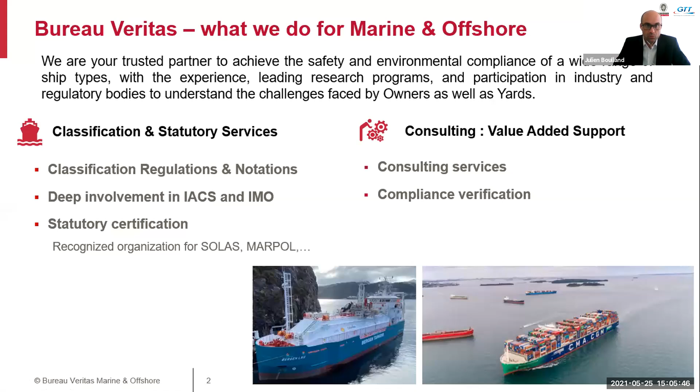Then in the third part, I will share with you what we do in Bureau Veritas regarding ammonia as a fuel. So we are about to release soon in July new rules on the usage of ammonia as a fuel on board ship. So we, in our role to support the shipping industry and support innovation, we in BV have worked on the development of these new rules. So please stay tuned, and I will share in this presentation the key principles and the content of this new rule note.

And then in the last part, the fourth part of my presentation, I will share on another notation that is called ammonia prepared. That also will be released this year, very soon in July as well. So in the scope of this ammonia readiness, we have worked together with GTT. So ammonia preparedness basically gives greater flexibility for ship owners whose intention is to go to LNG and ammonia. So at this juncture, I would also like to thank GTT for their trust and for the work that we have carried out for them on this ammonia preparedness.

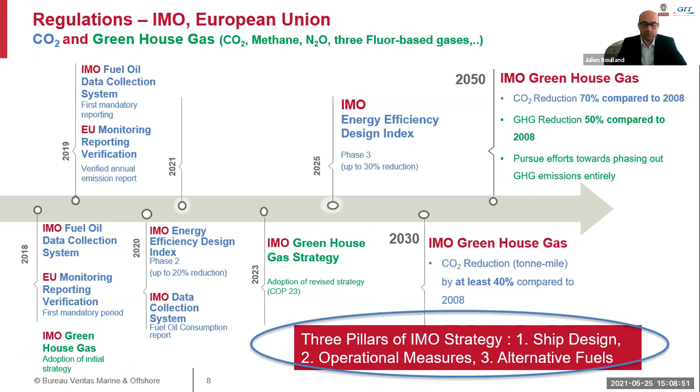What we see on the timeline is basically ship design is covered by this so-called EEDI, Energy Efficiency Design Index, which applies to a new build ship. So the phase 2 was in 2020, the phase 3 will be in 2025. In 2025, it will be required to have the 30% reduction on CO2 emission.

The other measure you see started in 2018 is basically the recording and monitoring of the fuel oil on board, with indirect calculation to determine the CO2 emission. Basically, the idea of this is without any data, we can't have a proper policy. So we need to have accurate data to rely on to set the policies.

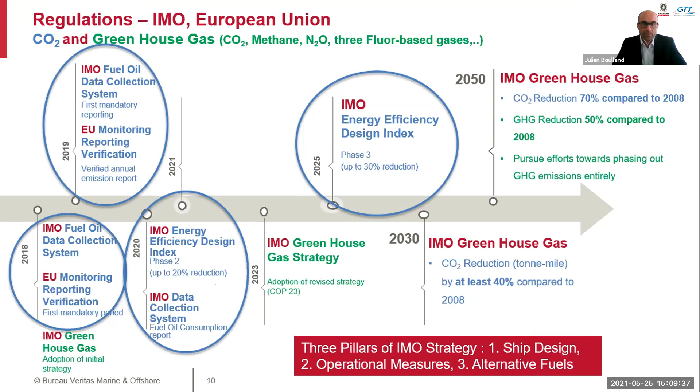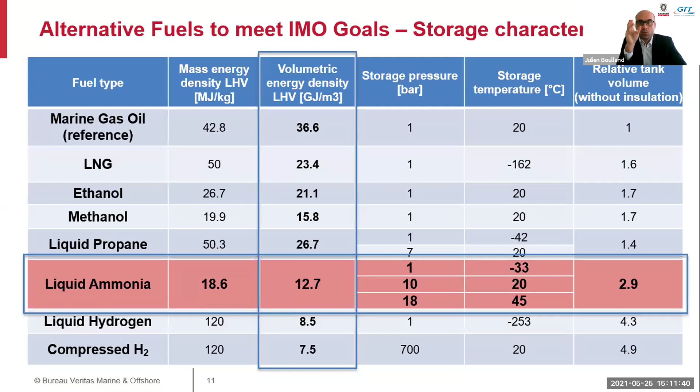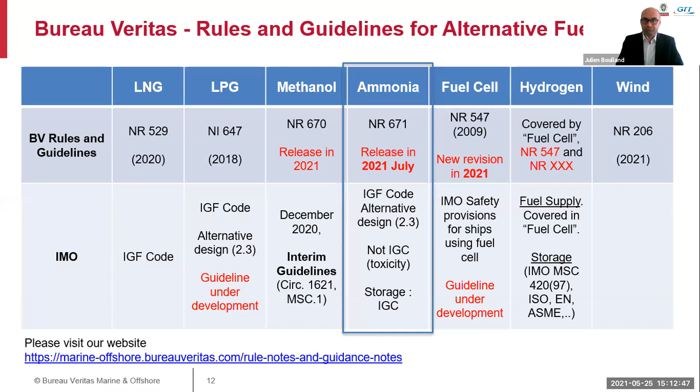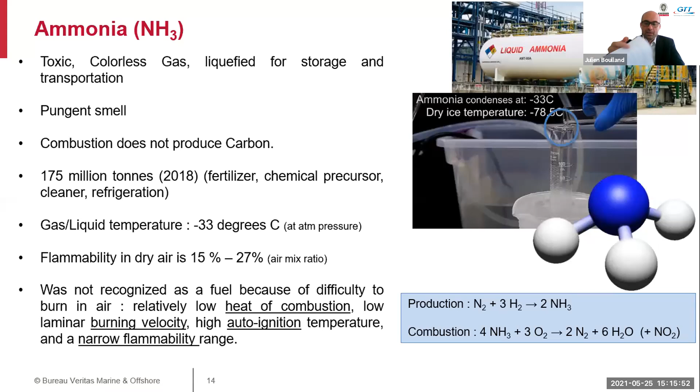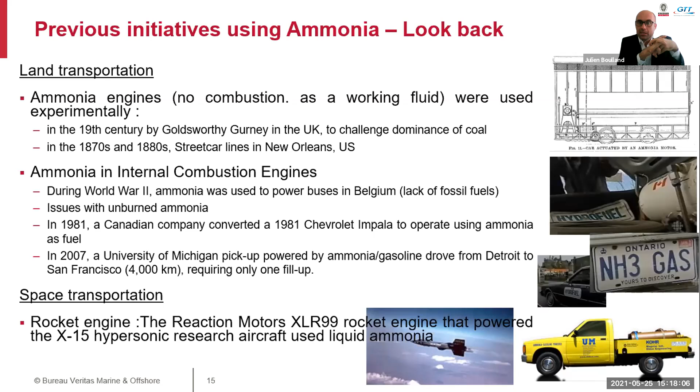The production of ammonia, as I said, is one of the most produced inorganic chemicals worldwide. We have 4 countries that cover more or less 60% of the worldwide production: China, Russia, USA, India. The production of ammonia in its industrial form makes use of the so-called Haber-Bosch process. Basically, we have one molecule of nitrogen and 3 molecules of hydrogen, and then we produce 2 molecules of ammonia. This industrial process operates at moderate temperature, 450 degrees Celsius, but very high pressure, 100 bar. And this process in its current form is very highly energy intensive.

That means on the production side of ammonia, definitely it's not carbon free. There is a lot of carbon that is produced. On the combustion side it's okay, it doesn't produce carbon, but on the production side, we have to work on it. This is why on this slide we've put, and we thank JGC Corporation for this, the so-called brown ammonia, which is the current form of production; the blue ammonia, where if we can capture carbon during production through a carbon capturing scheme, we can improve the carbon footprint of the production. And then the next phase will be green ammonia, produced from renewable sources. Then we have water electrolysis that produces H2, and in turn we produce ammonia. So it's still a long way to go to produce carbon-free ammonia.

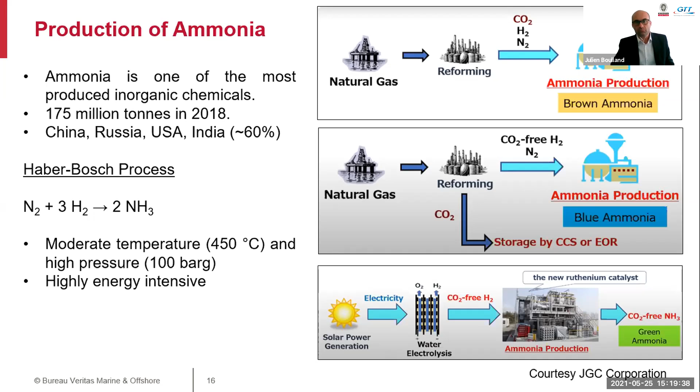Nevertheless, let's come back to shipping. The transport of ammonia at sea is a long story. It's been done for many, many years. Ammonia, again, not as a fuel, but as a cargo, is entirely covered by the IGC code. The IGC code is the code for the construction of liquefied gas carriers. So basically, ammonia is transported on board LPG carriers, either in a fully refrigerated form at minus 33 degrees or so-called semi-pressurized, semi-refrigerated at, let's say, a temperature of 20 or 40 degrees.

So here we have an example of an ammonia carrier, a 22,500 cubic meter LPG carrier. As I was saying earlier, ammonia, when we look at the liquid gas pressure-temperature diagram, is very much similar to propane.

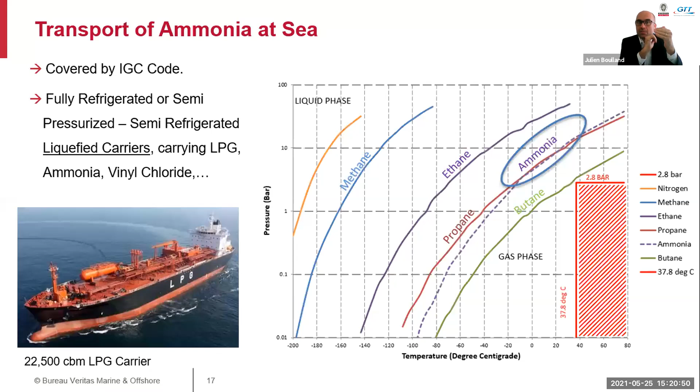Then going to ammonia as a fuel, the minimum ignition energy required to burn ammonia is quite high, several orders of magnitude higher compared to carbon-based fuels like methane, LPG, and methanol. So that's why we need to bring more energy in the combustion engine to burn ammonia. Also, the flammability range is different, so this is also something to consider when we develop engines.

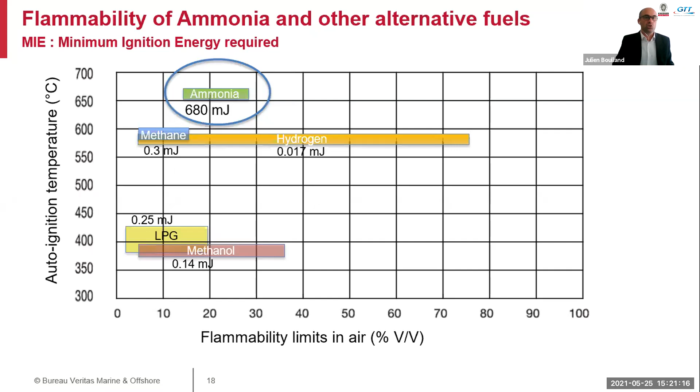Now let's have a look at the characteristics: the toxicity, environmental impact. So ammonia, I don't know if it's good or bad, but it's lighter than air. That's what we read in the LPG carrier operating manual. Basically, all the other gases transported by LPG carriers tend to be heavier than air. Ammonia is lighter than air, so it will go up. However, when the air is saturated with water, high humidity, ammonia will be heavier because there is a formation of an ammonia vapor cloud. So it will drop down in humid air.

Interesting feature, which is one of the, I would say, pillars of safety with ammonia: it has a very high solubility in water. We can dissolve ammonia in water. We can't dissolve gas that easily in water, but ammonia is easier. So that explains one of the safety features about ammonia, how to mitigate the impact of ammonia release.

When we look at toxicity, as I said, it can be smelled by a human at a concentration of 5 parts per million, 5 ppm. So actually, we can detect it before it becomes dangerous or lethal. At 30 ppm, ammonia starts to be dangerous. These two concentrations, 5 and 30, are also something we have put in our rule for ammonia as a fuel. We have detection at 5 and at 30 ppm. 30 will launch a water mist system to capture ammonia. And above 100 to 200 ppm, depending on the exposure time, ammonia has irreversible health effects.

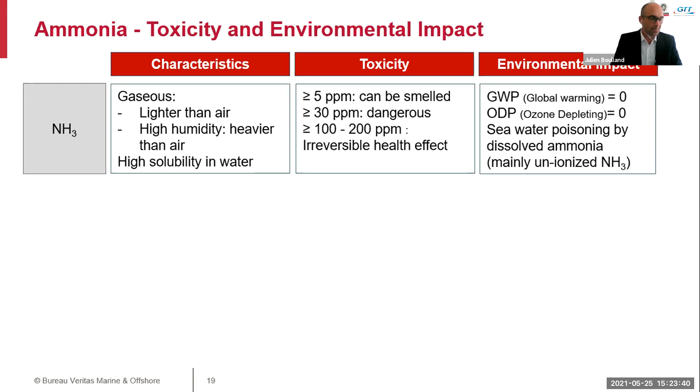The other toxicity is the byproduct of combustion. As I said, we can produce NOx, NO and NO2, by burning ammonia, so we have to be aware of that. It's a pollutant regulated by the IMO, so we have to control that. We also have unburned ammonia slip that we have to mitigate. And the last gas we can unfortunately produce with ammonia is nitrous oxide, the laughing gas. It's a very potent greenhouse gas with a global warming potential 300 times that of CO2. So we definitely don't want to produce N2O by using ammonia.

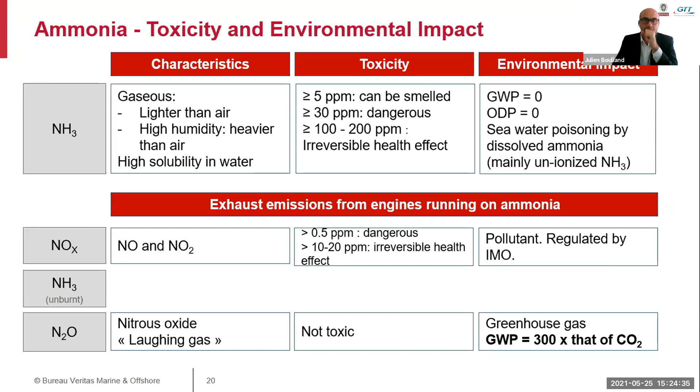So ammonia, now the corrosivity: it's an alkali. Basically it will corrode galvanized metal, zinc, copper, brass. So when we are talking about engine development, fuel gas supply system or tank development, it will not be possible to use zinc, copper, and brass. If the concentration of nickel in an alloy is above 6%, it's not possible as well. I think Stephane will develop on this in the material selection. There is some material we can't use for the membrane.

And it also touches on the quality of ammonia. It's not the same topic, but we have a similar topic with LNG on quality. If ammonia contains oxygen at a few ppm, it can promote stress corrosion cracking in steel, so we want to avoid oxygen. On the other hand, iron, steel, and specific non-ferrous alloys are resistant to corrosion by ammonia. And some rubbers and polymers are also compatible with liquid ammonia.

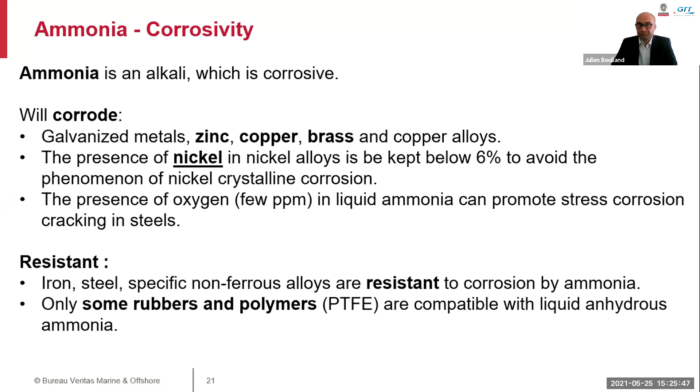Talking about engine. So basically, when developing an engine, we can use LPG or LNG engines as a basis, but the whole fuel gas supply system and engine have to be really rethought, taking into consideration the characteristics of ammonia that I have highlighted.

Basically, ammonia cannot be used in existing low-pressure Otto cycle engines because of the narrow flammability range and the high ignition energy required. So we probably need to use the diesel cycle and a certain amount of pilot fuel, up to 20%. The corrosivity on copper, nickel, and plastic means all the fittings on the piping, everything, the valves on an engine, will have to be rethought.

So material selection. One of the basic principles is also double wall, with ventilation of the inter-wall space. One of the challenges, as I said, is the problem of foul odor. This is the first step, and the next step is toxicity. So they have to have an ammonia capture system. We cannot release it like gas; with ammonia, we have to capture it and then release it.

Another challenge when developing engines is the multiple fuel supply system. Four-stroke engines, as we understand, will have to use a mix of fuels. So probably on board, we will have to have diesel, LNG, maybe ammonia. So flexibility is the key, we think.

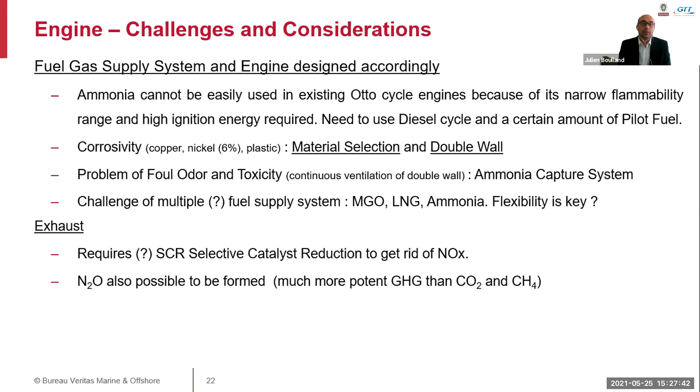And then talking about the exhaust, as I said, there might be production of NOx. So ammonia engines right now would need selective catalytic reduction, that means to capture and transform NOx into N2. And as I said, nitrous oxide can also be formed.

So now moving on to what we've done on the use of ammonia as a fuel. I will just go through the key principles of our new rule note in one slide. Basically, we want to prevent leakage, to limit the consequences of ammonia toxicity. So the tank and pipe will have to be designed at 18 bar and for 45 degrees Celsius, and double wall piping will be the design principle.

We want to detect and manage possible ammonia leakage. This is why I was saying we will have the 5 ppm and 30 ppm thresholds that will trigger various reactions in the system. The management of the leakage, we propose, will be through a water mist system. And when the ammonia is captured, the design will also need to cater for a concentration reduction system.

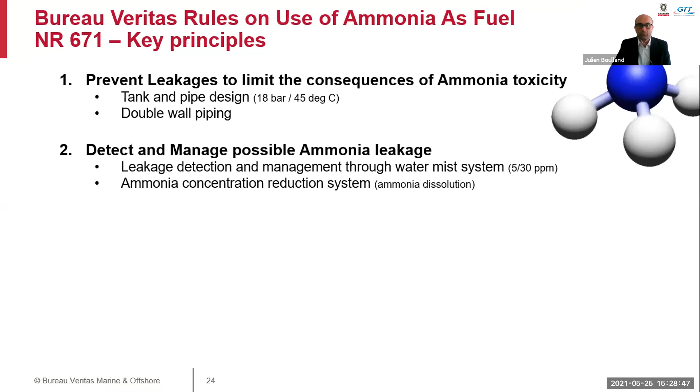They will be required to have a dedicated bilge system for the whole fuel gas supply system, to manage possible ammonia spillage. And the control of ammonia discharge at sea.

We know the reaction between ammonia, NH3, in water and NH4, which is non-toxic, is affected by the pH, the acidity of the water, the temperature, and the salinity. So through this chemical reaction, we can monitor the concentration of free NH3, which is the toxic molecule in this reaction, and control it by playing on pH and temperature. So the ship will have to have this mechanism to control the toxic version of ammonia before it is released at sea.

Corrosion prevention: we have a lengthy chapter on material selection for each and every part of the ship systems handling ammonia, because, as I'm saying, ammonia is corrosive on some specific materials. And the containment system is based on IGC, because IGC has done the work on the carriage of ammonia at sea as a cargo. So the containment system is a mix of the IGC code and IGF code approach. IGF is goal-based, and we'll also require a boil-off gas management system.

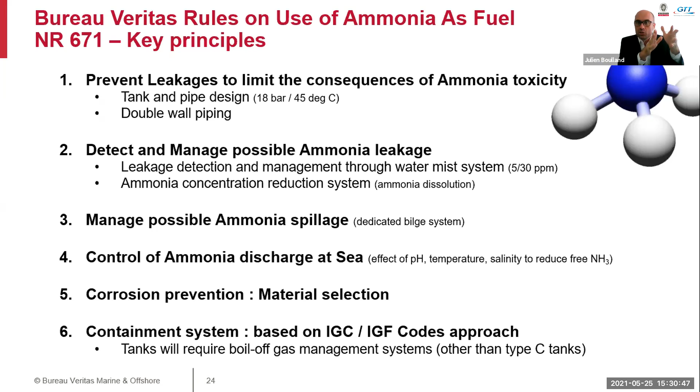We are involved in a number of projects. I cannot disclose everything, but this one is with a large consortium. BV is part of it, with various ship operators and makers. The purpose of this consortium is to investigate the feasibility of using ammonia as a fuel.

So the HAZID workshop was done 2 years back. The HAZOP was supposed to be done last year, but because of COVID, there was a bit of disruption, so it will be done this year. Basically, the purpose is to investigate the safety and operational hazards. All this work has, I presume, been fed into these various companies. As far as BV is concerned, we have used this work as one of the sources to feed our new rules for ammonia as a fuel.

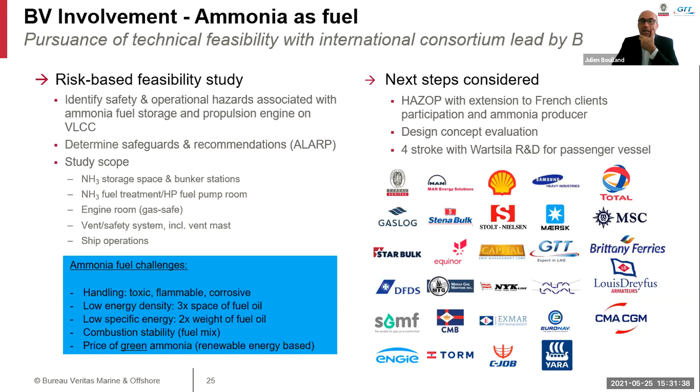And then the last bit is the ammonia prepared notation and the work that we have done for GTT. Basically, ammonia prepared will give a ship operator additional flexibility when they want to go to ammonia, but not straight away. They may want to start first with LNG and then go to ammonia, or use conventional fuel and later go to ammonia. So we have this ammonia prepared notation.

To grant this notation, we will have to have a full design review through a risk assessment of all the machinery and engine propulsion system. They have to have minimum arrangements on board for space reservation, ventilation, piping, taking into account the hazardous area, and structure and stability also have to be investigated. Ammonia is a bit heavier than LNG. We'll also give an additional class notation or sub-notation that will cover piping, engine, and tank.

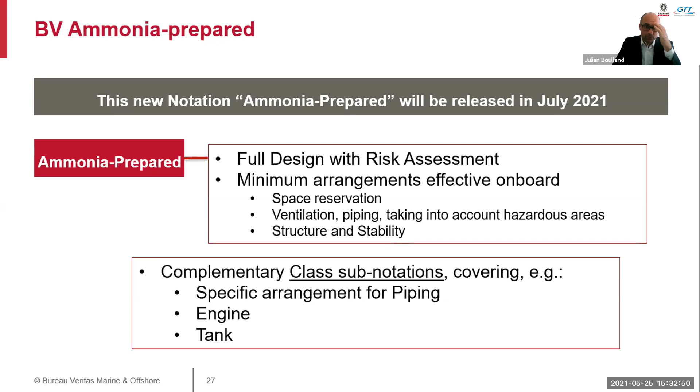So now we will pass the floor to Stephane. We are very proud to have worked for GTT on ammonia readiness. We have given the approval in principle for the system to be used for ammonia, and Stephane will share more detail on the work and what GTT is proposing. Thank you very much. After this session, we can take a few questions, and if we run out of time, we'll take more questions by email or direct conversation.

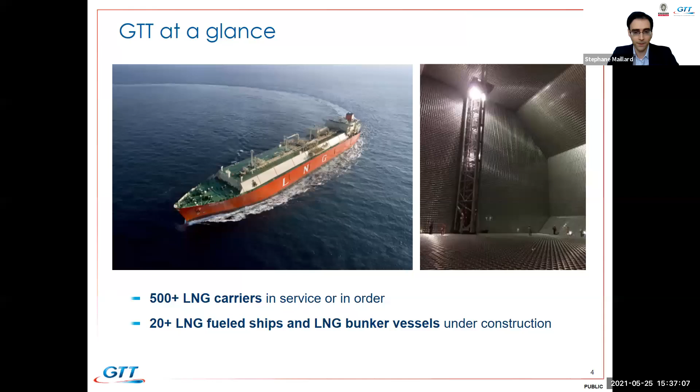In November last year, the CMA CGM Jacques Saadé loaded a full LNG bunker from the Gas Agility bunkering ship, chartered by Total and owned by Mitsui O.S.K. Lines in Rotterdam. In half a day, even less than that, we loaded about 8,000 tons of LNG on board the ship, simultaneously with about 5,000 TEU of containers, as in Rotterdam, SIMOPS are authorized for LNG bunkering, thanks to proper analysis and advanced cargo loading software.

So this ship is able with only one fueling to do a round trip between Asia and Europe of 84 days with a bunker tank of about 18,000 cubic meters of LNG. So this ship, the Jacques Saadé, is the flagship of a new fleet of 23,000 and 15,000 TEU LNG fuel vessels ordered and operated by CMA CGM.

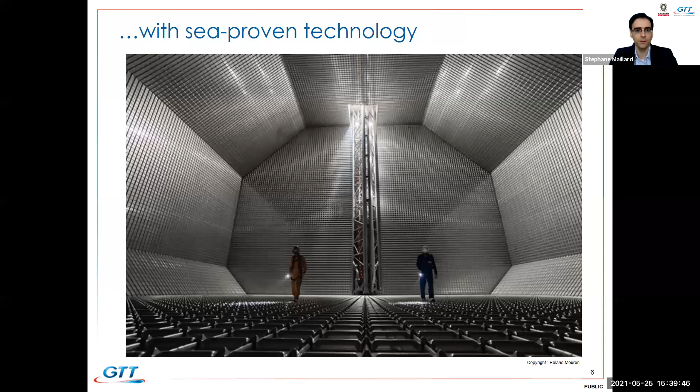So this container ship project was groundbreaking, set a new reference, but we must also challenge the existing solutions. So we received an order from Vard shipyard of the Fincantieri group for one of the most advanced expedition vessels of the cruise company Ponant. So for this first cruise project, the tank has been designed with an increased pressure of 2 bar gauge to provide some additional flexibility. So this is something we can propose today for tanks of a few thousand cubic meters.

But in addition to that, on the right side of the slide, you can see 2 technologies, Type C and membrane from GTT. And initial ship arrangement was based on Type C with 2 bilobe tanks. Due to the limiting shape of this kind of tank, the storage capacity was hardly reaching 3,000 cubic meters. But when we took over the project, thanks to the membrane compactness, thanks to the membrane shape efficiency, we were able to store 4,500 cubic meters of LNG, so 50% more. And in addition to that, save 100 square meters of deck, which is the green area. So that has been as well an optimization work that we did with the yard and the owner to bring more flexibility, optimize the ship project.

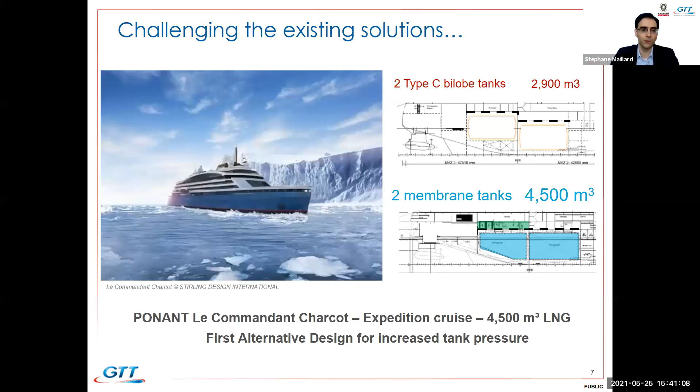But of course, we had to develop a specific tank for the aft part, for the last one. And this is the aft tank, how it looks once completed. So you can see the tank slope, which efficiently follows the body line. So these are examples of work that we are doing for LNG fuel projects, container ships, cruise ships, but we're also working on tankers, bulkers, car carriers projects. So these are additional types of ships that we're studying.

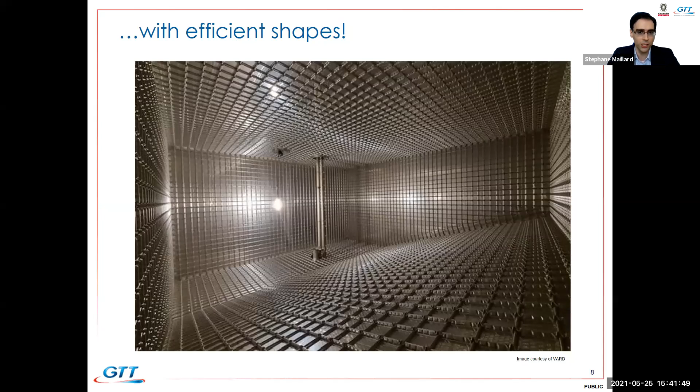And on the picture, you have noticed inside the tank, they look pretty similar because they use our well-known Mark III technology. So it's a technology that we introduced in the early 90s. The system evolved over the years to offer a wider range of options, deliver more and more demanding projects. So for example, for better insulation performance, we developed Mark III Flex and Mark III Flex Plus. This technology, Mark III Flex Plus, in fact, today provides the lowest boil-off rate on the market. We developed as well Mark III HD, high density version, that we use for cargoes heavier than LNG, such as LPG or ethane.

So when we need to develop our projects, we will have a portfolio of solutions for the technology in terms of boil-off rate or strength to optimize the project of the client. And today, this Mark III technology has crossed another step by offering compatibility with ammonia.

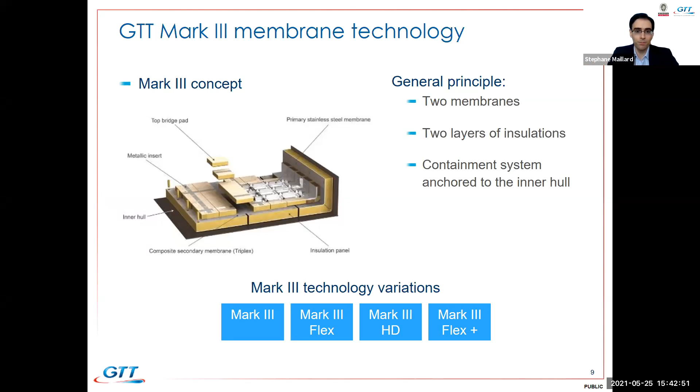So why ammonia? Actually, several projections give LNG as a predominant marine fuel as soon as 2040, with increasing shares of biosourced or synthetic LNG. But some projections also give ammonia a good share in the marine fuel from 2040 and beyond. Still, CO2 regulation is not in place. So owners may be unsure of what to expect in the future. So LNG is often seen as a bridging solution.

So today at GTT, our idea or concept is to offer a proven solution for LNG fuel now with a compatibility for ammonia fuel in a few years. So our proposal: LNG is today the only fuel available to reduce CO2 with fast return on investment. We have a potential for membrane tanks to store ammonia with no or very limited cost of conversion, especially on the tank. There would be conversion on the engines, obviously. But the tank, the idea is to keep the tank as is.

And by doing this, we keep the door fully open later on to either carbon neutral LNG, bio-LNG or synthetic LNG, or switch to ammonia. So we are currently working with classification societies on this. We received, as mentioned by Julien, a first approval in principle from BV in February this year.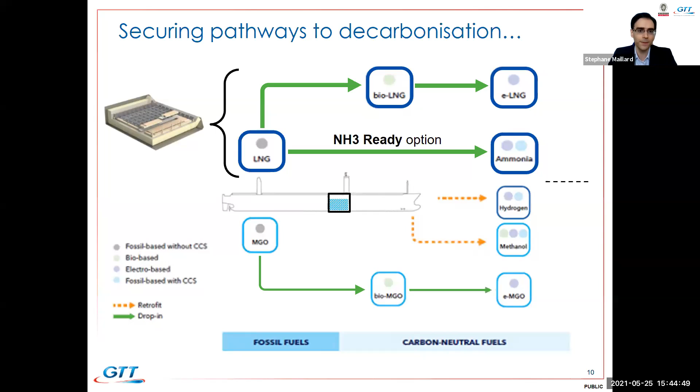And we're also working together with engine makers, fuel gas handling makers, to have a complete overview of the conversion and ammonia ready option. And we're also working or planning to start a joint development project with some yards. So whether it is LNG, bio-LNG, synthetic LNG, or ammonia in the future, our tank solution will be kept the same.

We're also working, as I mentioned in the introduction, in the digital world. Recently, we completed our offer with the few companies we acquired. So today we're able to offer one platform, including voyage, trim, machinery optimization, with references across the various shipping markets. And we're also working on automatic reporting of CO2 emissions. So that's an additional field GTT is venturing into. But let's focus on ammonia today, which is the topic for this seminar.

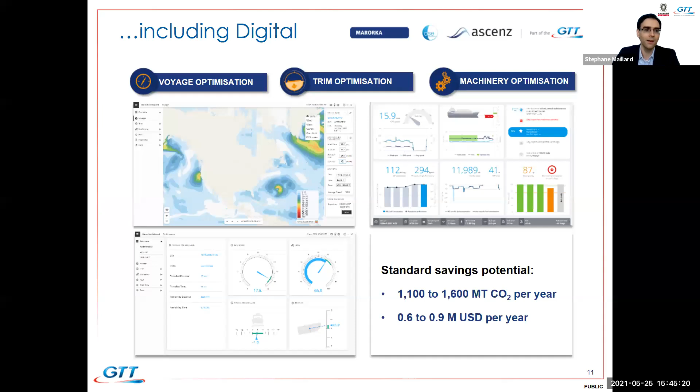So as a tank designer, we have to work around four main topics. On a general basis, of course, safety and reliability are at the core of our development, but we have to couple this with cost effectiveness and a solution that is ready to face the future. Digging deeper, we can identify four areas of attention when talking about ammonia as a bunker fuel, as already introduced by Julien. And if we look from our perspective as a tank designer, one is toxicity. Ammonia is an irritating gas at low level exposure, but at very high threshold, it can even be lethal. Together with toxicity comes containment, confinement, how to monitor the tank's health and how to treat any leak of product.

Third, again, as highlighted by Julien, a proper selection of material has to be made to cope with corrosivity, corrosion issues. And finally, we have to keep in mind that ammonia is not as energy efficient as LNG. So as a rule of thumb, for the same cruising range, you need to store twice the quantity of ammonia compared to LNG. So if you need 1,000 cubic meters of LNG to reach your destination, for exactly the same distance, you will need 2,000 cubic meters of ammonia. So that is a consideration to have as well when we design the project, and especially a conversion from LNG to ammonia. So let's take a look at these points.

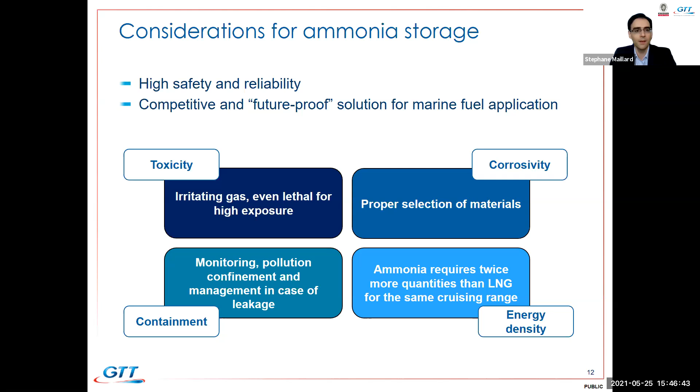So as a reminder, the objective is to check our Mark III system, currently on the market for LNG, and check its suitability to store ammonia. So corrosion and material compatibility. We have to check that our insulation system components are safe to use. Our primary container, primary barrier, which is permanently in contact with ammonia, is made of stainless steel 304L, which means that, according to the IGC code, this component is perfectly compatible with ammonia. So contrary to other types of steel, such as 9% nickel or high manganese, there is no doubt today that our primary barrier is compatible to store ammonia. Similarly, we conducted compatibility tests with other materials of Mark III, and we did not find any showstopper.

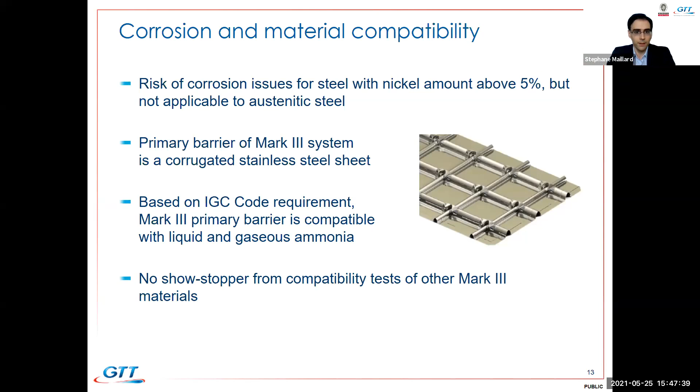Secondly, toxicity and containment. So this is one very specific particularity of the GTT membrane system we use: the use of two barriers in the architecture of the tank. On the picture, you can see here the two barriers, one in red and one in blue. The red one is the primary barrier. It's permanently in contact with the liquid and the gas. So it's the stainless steel barrier membrane I presented in the previous slide. And the blue one is a backup.

In addition to that, we propose to have also the hull as an additional barrier, so the gray line on the picture, similar to an LPG ship, for which you usually consider the hull as a secondary container. So the consequence of this, the steel grade of the hull structure shall be compatible with ammonia temperature at -33 degrees, which is not a complicated feature to implement. This is what's done on an LPG ship today.

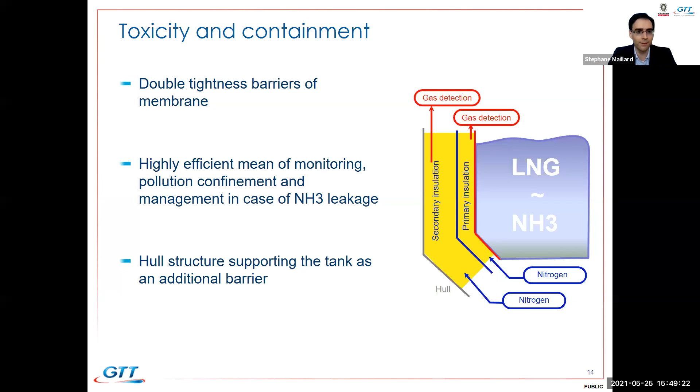By doing so, we end up having a very robust way to contain any pollution, any leakage of ammonia, thanks to these successive barriers between the product itself and the environment. On top of that, each space between these barriers is inerted with nitrogen and monitored. So we can safely treat any ingress of gas, as we can collect the gas that is potentially intruding inside the insulation space. So we can detect, monitor, and treat any ingress, which provides a high level of safety for the storage. So these have been pillars of our ammonia-ready concept that we developed.

As mentioned before, we received from Bureau Veritas this AIP, testifying the suitability of the Mark III system to carry LNG and ammonia. So at design stage, I insist, at design stage, this notation can be selected. And then as a designer, we will implement a few elements. One is the steel grade of the hull supporting the tank, and some reinforcement related to the density of the cargo. As you may know, ammonia density is higher than the one of LNG. So this has to be taken into account in terms of strength of the containment and the hull scantling. I will illustrate with some examples later how we do this.

So this has been an AIP we received in February this year from BV. But if you remember, I mentioned 4 considerations for tank designers: toxicity, corrosion, containment. These 3 have been explained and sanctioned in this AIP. And the last one, the energy density, is not a technical matter per se, it's an operational consideration. So I would like to illustrate this with 2 examples.

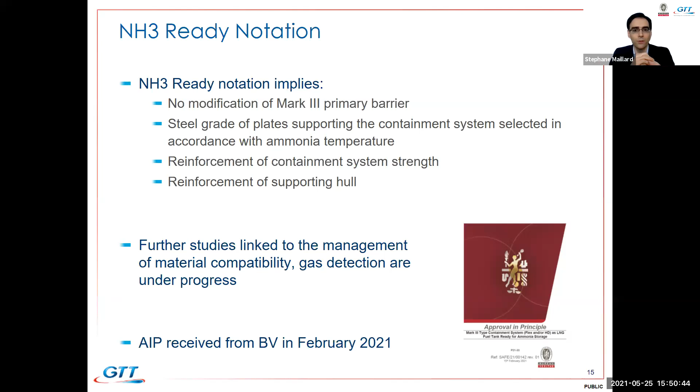The first one is an application to a container ship. That is an example on a 15,000 TEU vessel, which is quite a popular size these days. We are used to locating the tank under the accommodation and sacrificing one adjacent container bay, either in front or behind. And we reach typically a volume of about 12,000 cubic meters, sometimes a bit more, such as 14,000 cubic meters. So we locate the tank here. It's the blue square on the top picture.

But let's compare the solution for a pure LNG dual fuel vessel versus LNG dual fuel with an ammonia-ready tank. On the bottom picture, you can see in blue the tank shape for a pure LNG dual fuel ship. For an ammonia-ready tank, which is in green, you can see that we are slightly adapting the tank shape, narrower, taller, and we will also increase the insulation strength to cope with the density of ammonia. So you can see in blue, the foam density would be 170 kilograms per cubic meter for the Mark III system, while in case of the ammonia-ready tank in green, the foam density would be increased to 210 kilograms per cubic meter.

So you can see how we use our Mark III portfolio to design and optimize the tank according to the application. But in any case, we will keep the same overall volume. These 2 shapes, when you multiply by the length, still keep a volume of 12,000 cubic meters. Which means that later on, when the fuel is switched from LNG to ammonia, the cruising range will be divided by 2. So bunkering activity will be doubled, or the bunkering infrastructure shall be in line with this, as the bunkering process will become more recurrent.

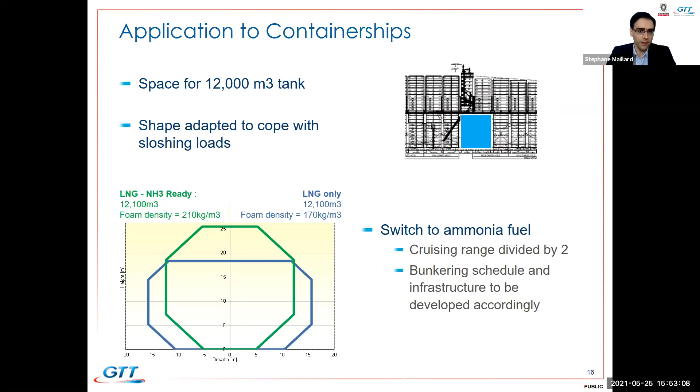But technically, it is also the maximum size for Type C tanks on such ships, because the space required on board with 2 Type C tanks of 3,000 cubic meter takes a lot of space in the aft part of the ship. And there is a limitation, which makes it very hard to locate more than 6,000 cubic meter with Type C on a Newcastlemax in the aft part of the ship.

But if you remember the cruise ship project, membrane system is more compact, is much more space efficient. So here, for Newcastlemax, we will use the same advantage. Thanks to our modularity, we are able to install a tank on a Newcastlemax behind the accommodation. We are able to install 7,500 cubic meter of storage capacity. Still no impact on cargo because of the tank location. So we can afford to make bigger tanks on the ship because there is no impact on cargo.

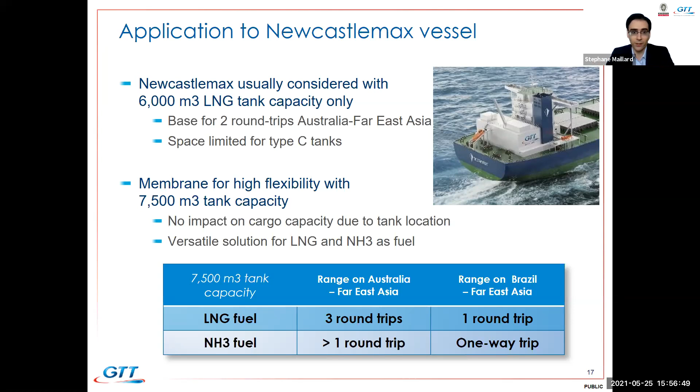So how can we help? If you're a ship owner or a charterer, we can assist throughout the project from the concept, as I illustrated before, up to the first bunkering operation. We provide all the engineering, on-site supervision during construction, services during the ship's life. So don't hesitate. We are here to help you, and we will be happy to help in your journey. Thank you very much.

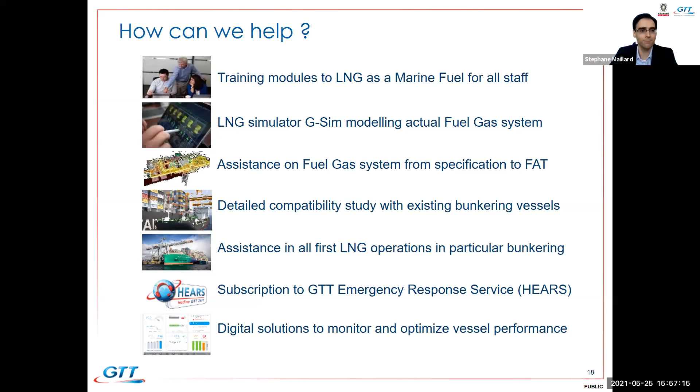All right. Thank you, Stephane, for the excellent and informative presentation. We'll now come to the Q&A session to address some of the questions that are raised by the audience. May I invite Julien to turn on your video, and Stephane too. Yep. Okay. All right. Maybe I'll direct the first question to Julien.

Julien, you have presented on the various alternative fuels and compared their various characteristics. So since there is quite a lot of interest in both ammonia and hydrogen at this point in time, in your view, which fuel is likely to be leading in terms of maturity?

Julien, you're on mute. Yeah, thank you for the question.

Now, as we were saying, LNG is mature. It's been developed for 20 years. Now it's mature. So we believe it will be a so-called bridge fuel, maybe for the next decade, because it definitely provides advantages in terms of CO2 emission, 20% less compared to a conventional fuel.

Then talking about the next generation, whether it's hydrogen or ammonia, as I was saying, it will probably be a combination of fuels. Flexibility and mix may be the solution. Also, it comes with CAPEX, it comes with OPEX. So we have to understand that as an industry.